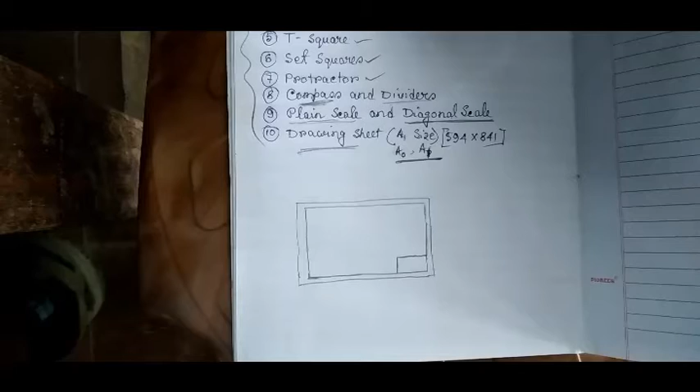Today I will show you how you can draw in the drawing sheet, how you can place the drawing sheet and how you can draw. So you know the drawing sheet, suppose A1 size, I have already told you that it has two faces.

Two faces means two sides are there in the drawing sheet. One face is smooth and another one is rough. One side is rough and another is smooth. You can easily feel it with your finger which side is rough and which side is plain.

So place the rough side always in front of your face. Keep your drawing sheet, place it on your drawing board, and the rough side of the drawing face must be above, facing you. So you have to draw your drawing on the rough side.

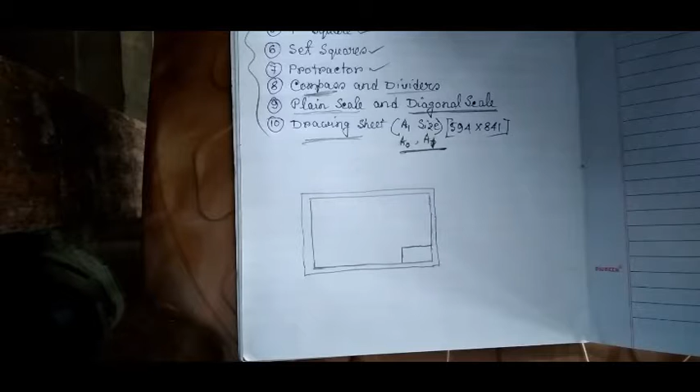Then you have to draw a border line also in your drawing sheet. So what is the border? Border means the portion enclosed by the edges of the trim sheet.

So this is your trim sheet, meaning the drawing sheet, trimmed. This one is your drawing sheet, the trim sheet - the space between the trimmed drawing sheet and the frame limiting the drawing space. So this is the border, and this is the border line that you have to draw.

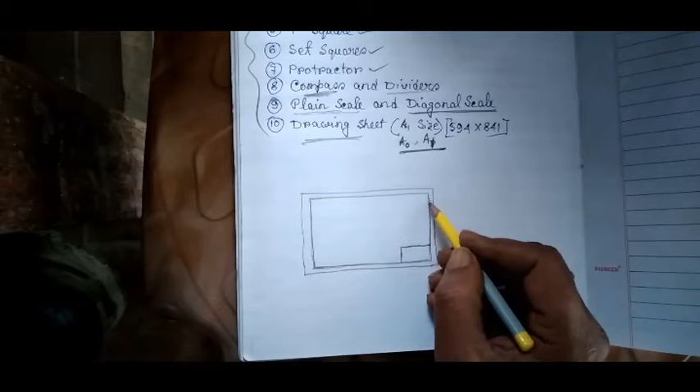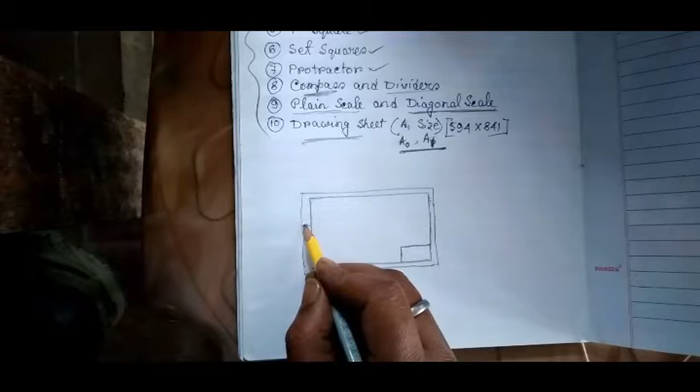First of all you have to draw this border line, and it has a specified distance from the trimmed portion. These are the trimmed portions of the drawing sheet. There is a specific distance of this border line from the trimmed portion. You take this distance from the trimmed section of the drawing sheet to the border line - it must be at a distance of 20 millimeters.

Take 20 millimeters at the left hand side, and on the other sides you may take 10 millimeters each. So this is your drawing space - you have to draw within this border line. Don't draw beyond this border line. This is your drawing space, and you have to draw any drawing within this drawing space.

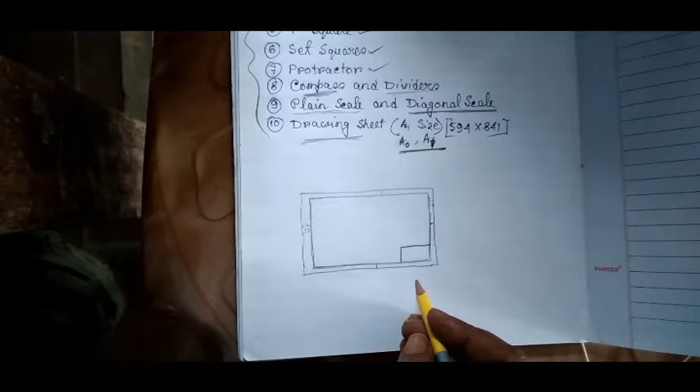Another thing you can see here at the right hand bottom of this drawing space - another rectangular box is there. This is called the title block of the drawing sheet. Title block means everything about who drew the drawing, the name, and every specification you can write here in this title block.

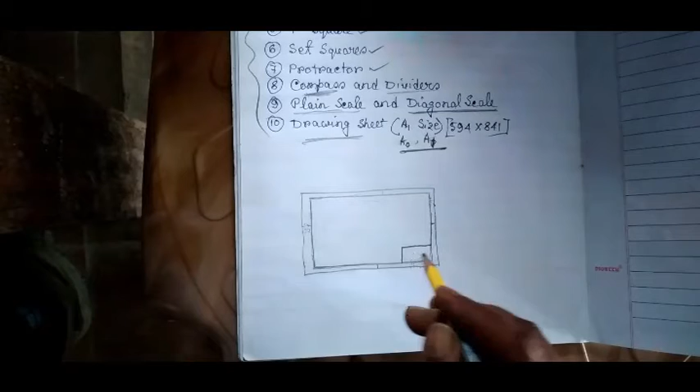The title of the drawing and so many other things are there that I will tell you later. So this is the title block, this is the border line, and the outer one is your drawing sheet. You place the drawing sheet on the drawing board and it is fixed with at least four board clips. Then you have to draw this border line in your drawing sheet.

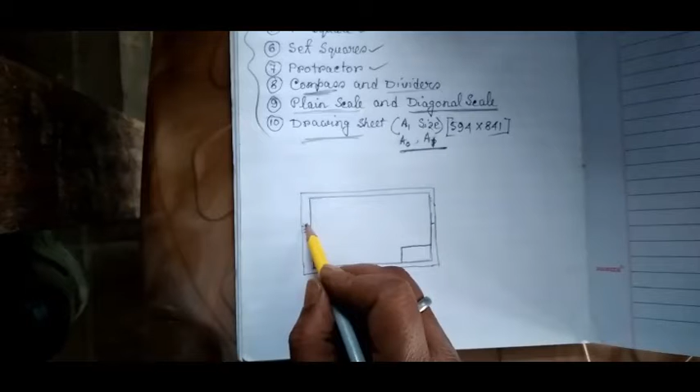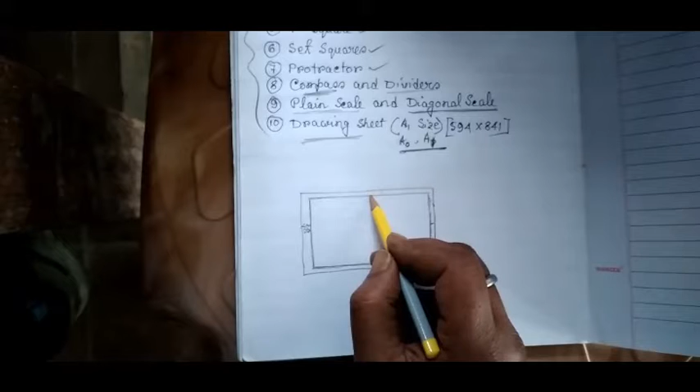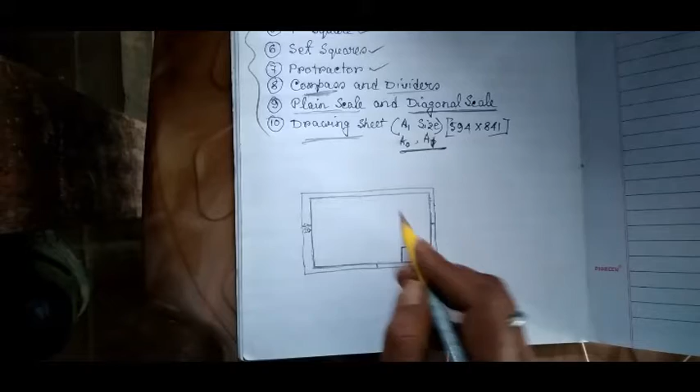As I told you, take 20 millimeters distance at the left as the border area. Take 20 millimeters from the left trimmed side of your drawing sheet. This line is 20 millimeters from this side, and the top line is 10 millimeters from the top. The right hand side also take 10 millimeters as a border, and at the bottom also take 10 millimeters as a border, then draw this border line. So this is your drawing space, understand clearly?

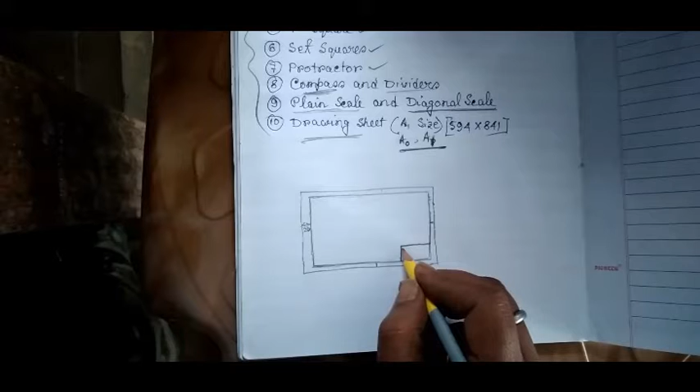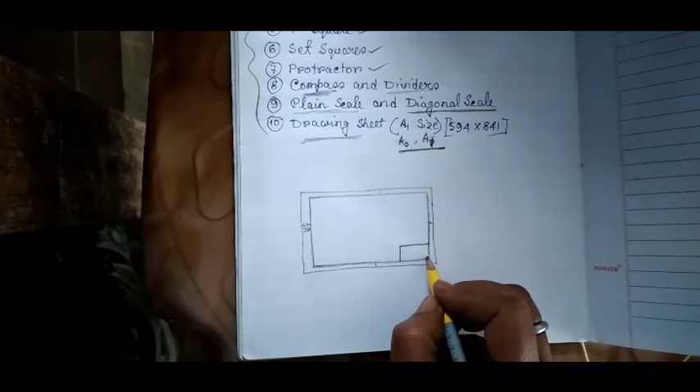The length of this title block is about 170 millimeters, and the height may be 65 to 80 millimeters. You may take it 65 from here to here - this is 65 to 80 millimeters. And from here to here is the length of the title block, you can take it as 170 millimeters. So this is your drawing sheet.

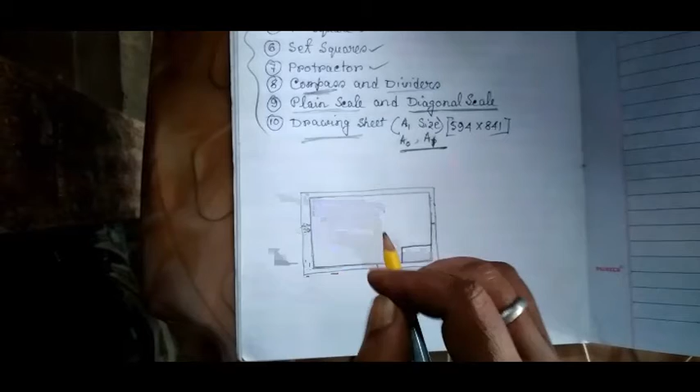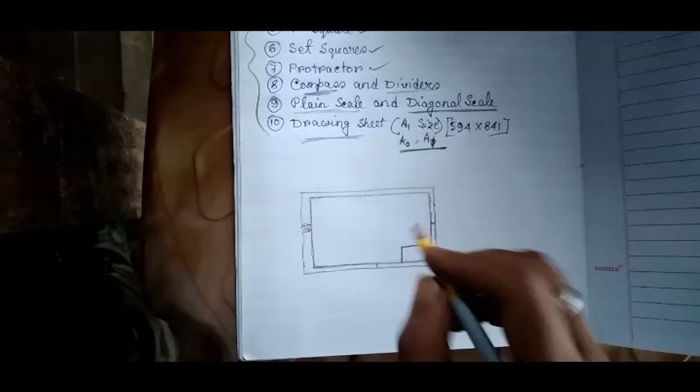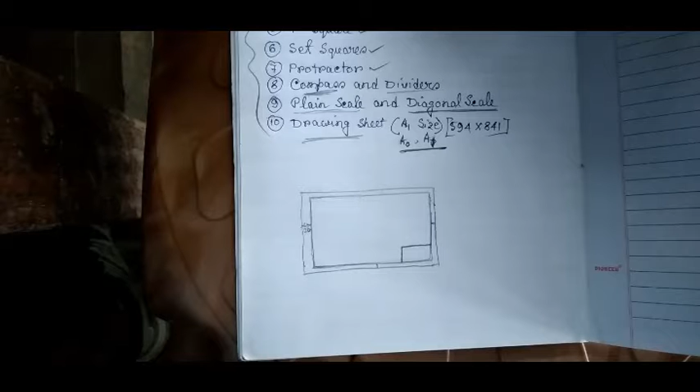Now remember that whatever drawing you have already drawn, whenever you want to write anything in your drawing sheet, that writing, the letters must be in block. Don't write any small letters - don't use small letters. Only use block letters or capital letters if you want to write anything in your drawing sheet. This must be remembered - whatever you want to write in your drawing sheet.

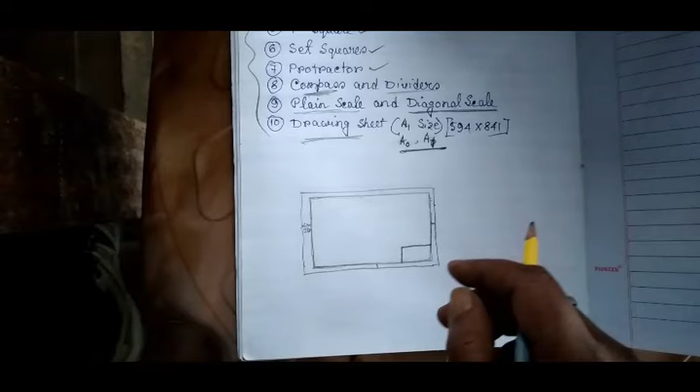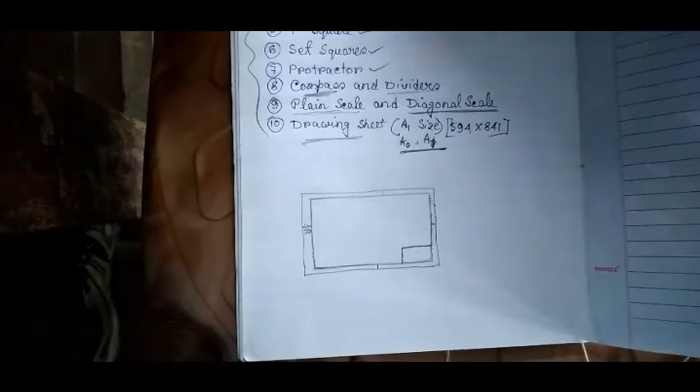So every time use capital letters to write anything. Understand? Now, in drawing, every line - if you want to draw anything, you have to draw a line. So every line in a drawing has a specific description and its applications also. Suppose I am drawing a line, two lines are there, this line and this line.

I've drawn here two lines. This line is a thick line, and this line is a thin line. Every line in this drawing has a specific meaning. This is called continuous thick line and this is a continuous thin line.

Every line has its general application. Suppose I want to draw a cube. A cube means whose length, breadth and height are all the same. Suppose I want to draw a cube.

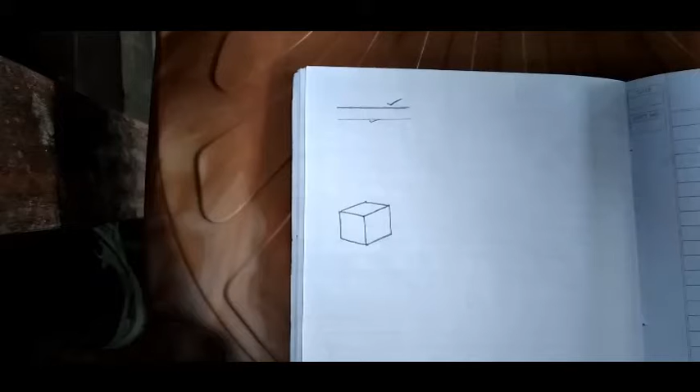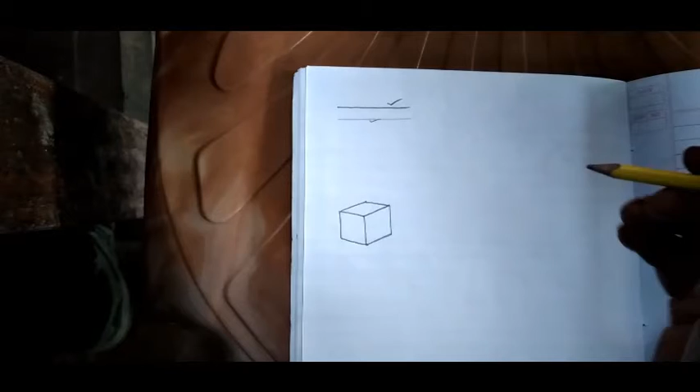You can see here, this is a cube. We draw this cube, meaning it is a drawing, but it represents a cube, you can understand. So we draw this cube with the help of this continuous thick line. What is the application of this line in drawing? That is the visible outline, meaning it is the outline of the cube, and we draw the cube with the help of this continuous thick line.

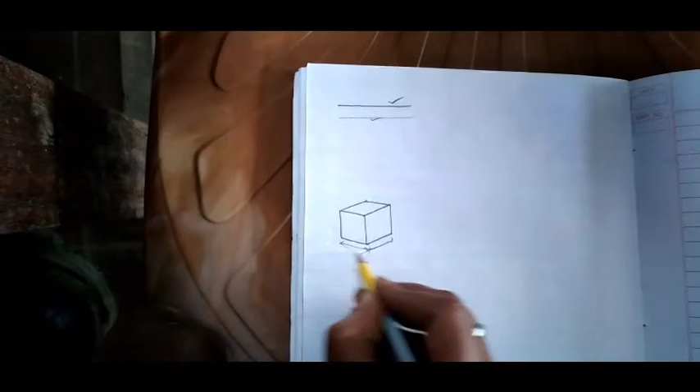So here you can see that this is a cube. Cube means suppose this is length, this is breadth, and this is the height of the cube. In a cube, this length, breadth and height are all the same.

All are the same. Now, in a cube, how many edges are there? How many edges are there? And how many faces are there? And how many corners are there? That you have to know.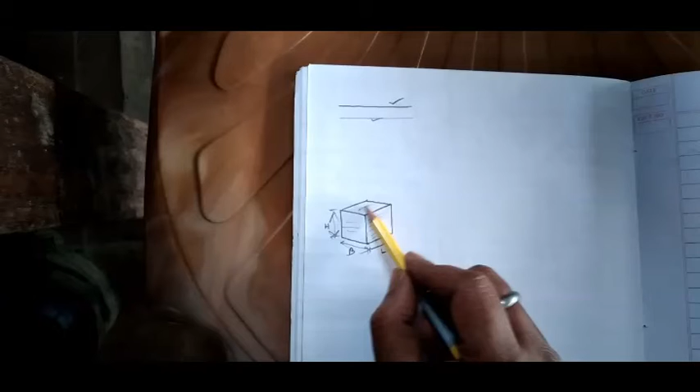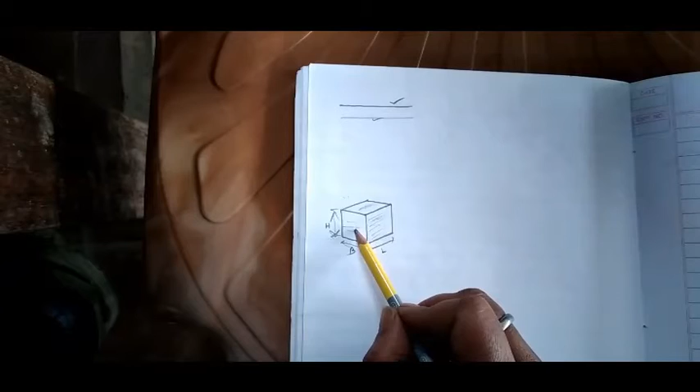So what are the faces? In a cube you can see this is a face, this is another face, this is another face. So 1, 2, 3 faces are there, and there is a bottom side, another face is there. In the right hand back side another face is there, in the left hand back side another face is there. So how many faces are there in a cube? 1, 2, 3, 4, 5, 6. So in a cube, 6 faces are there.

In Bengali it is called 'tall'. Chota tall ache, meaning 6 faces are there.

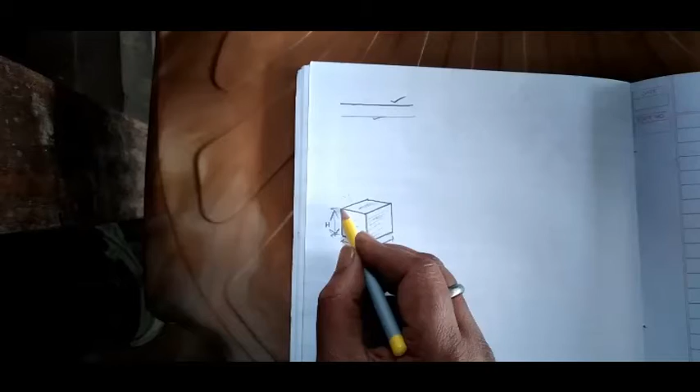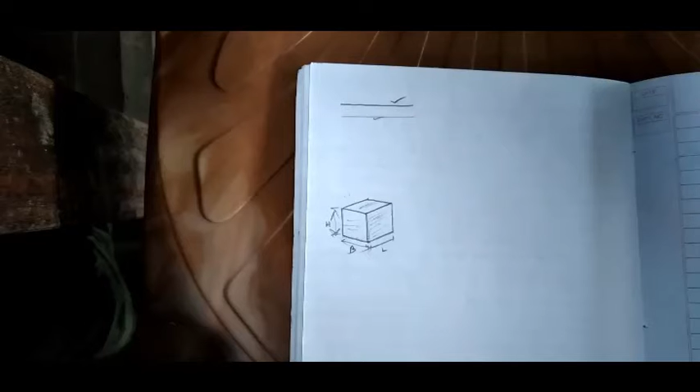And you can see edge. Edge means where two planes meet - this is a plane or face and this is a plane or face. So these two faces coincide here and this is called an edge. This is another edge. So many edges are there. In the back side, suppose here we can see 1, 2, 3, 4, 5, 6, 7, 8, 9. 9 edges that we can see in this drawing. From this side you can see how many edges here? 1, 2, 3, 4, 5, 6, 7, 8, 9. 9 edges that you can see in this drawing.

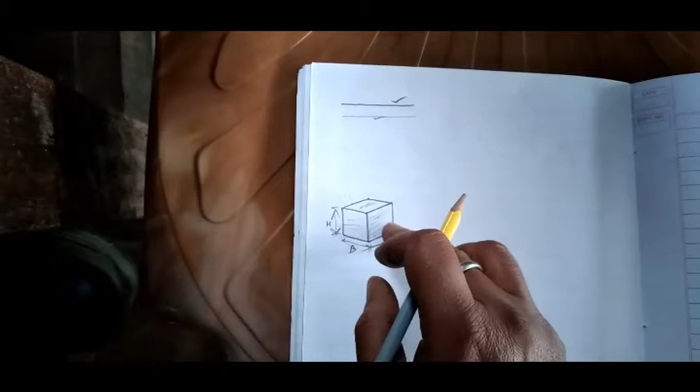But there are other edges too. How many edges are there in a cube? In a cube there are 1, 2, 3, 4, 5, 6, 7, 8, 9, 10, 11, 12. 12 edges are there in a cube. If you take a cube in your hand and count how many edges, then you can see that there are 12 edges in a cube. But in this drawing of a cube, we can see only how many? 9 edges. 1, 2, 3, 4, 5, 6, 7, 8 and 9 edges.

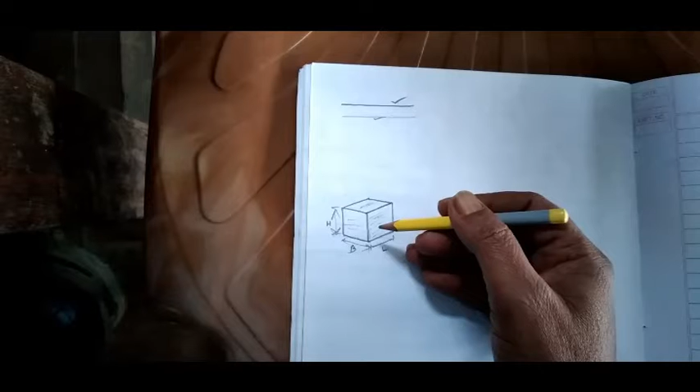But where are the other 3 edges? 3 edges are there behind or below, but we can't see them because it is a solid, and suppose it is not a transparent one. Not transparent means we can't see the back side from our front side - we can't see the back side because a wall is there.

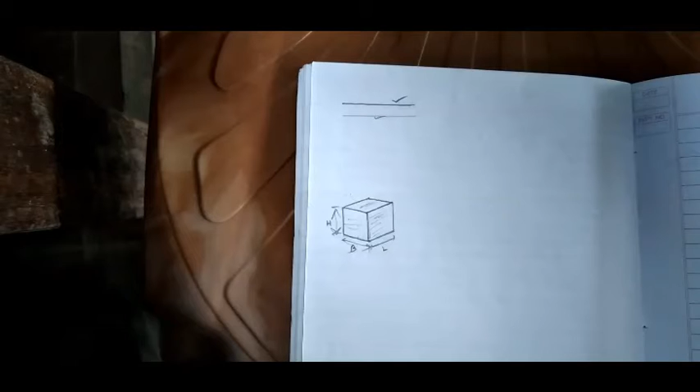Suppose in your house so many walls are there. You can see only the front side of the wall if you are in your room, but you can't see the outside wall. If you are inside the room, you can't see the backside of the wall. Why? Because I am standing in the front side, meaning I am inside the room, so I can see only the front side of the wall, because light can move only in a straight line. That's why the reflection of light from the backside of the wall can't reach our eyes. That's why I can't see the backside of the wall.

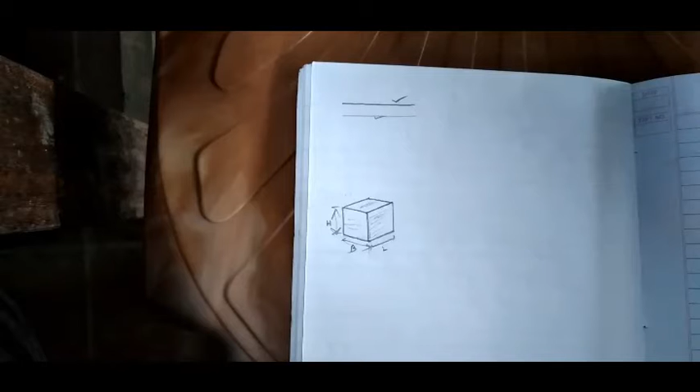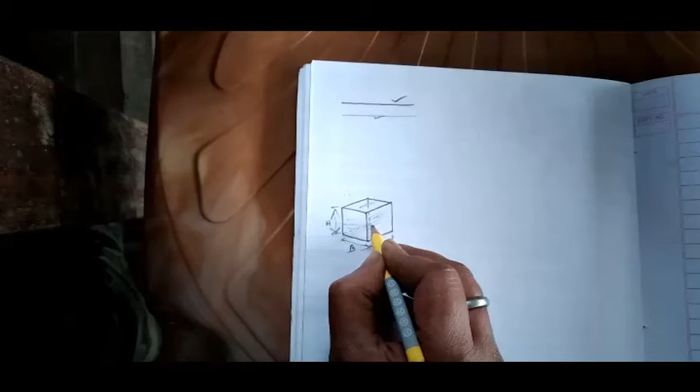And why can we see the front side of the wall? Because the light which reflects from the front side comes into our eyes after reflection. That's why we can see the front side of the wall. So in this cube, there are another 3 edges - where are they? You can see, just like this, other edges are there at the back side of the cube, just like this.

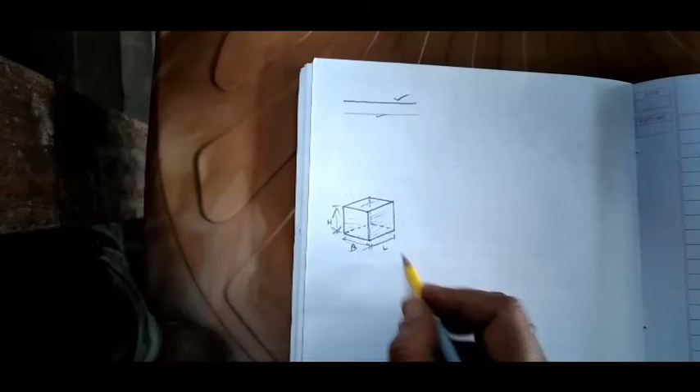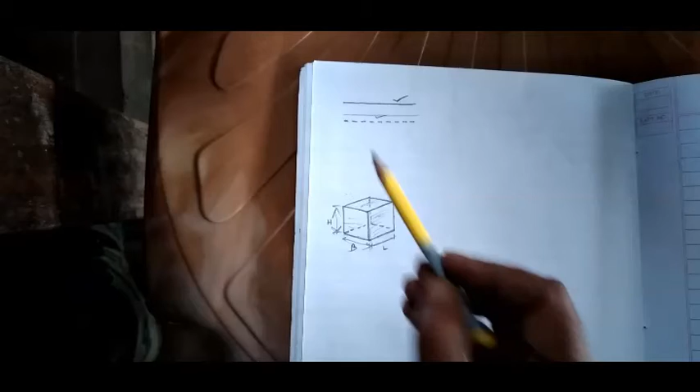So how many edges? These edges I can't see from the front side, but the edges are there. Now you count these back side edges, and I draw here a line also. That is an interrupted, not a continuous line. Understand? This line is called dashed line, just like this line. So these backside edges which are in the backside, that I can't see from my front, but the edges are there. I have drawn them with the help of this dashed line.

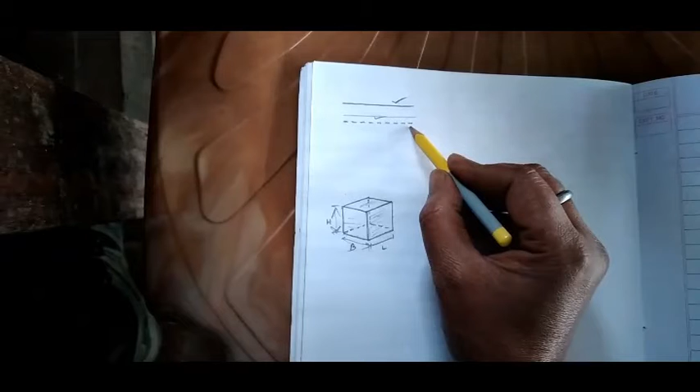This is called dashed line. So any hidden edges or any hidden outlines that we can't see, hidden means that we can't see, but edges are there. I can't see from the front. If I go to the back side, then we can see the back side edges, but from the front side I can't see it. Understand? So these are the edges, and this line is called dashed line.

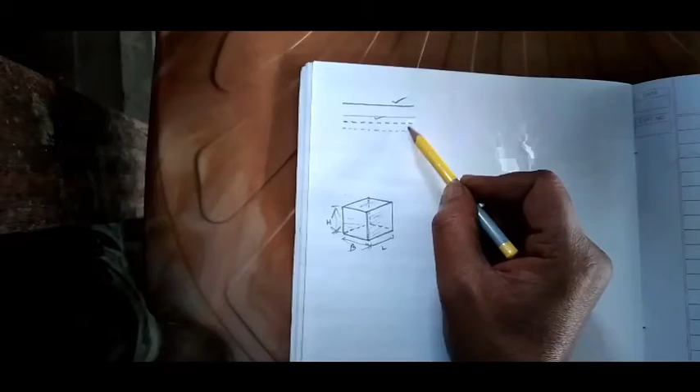Now another line is here. This is a thick dashed line and this is a thin dashed line. But we can use any one of the lines for showing any hidden outline or hidden edges. Understand? So it means that in our drawing, every line has a specific application.

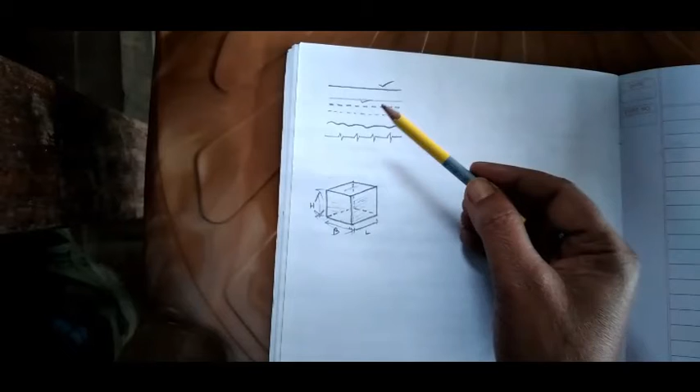Suppose this is a line, and another line is just like this. This is a continuous thin freehand line, and this is also a continuous thin line but with zigzag line. So this one is a continuous line with freehand, and this one is a continuous line with zigzag. Understand? So these two lines also have a meaning there.

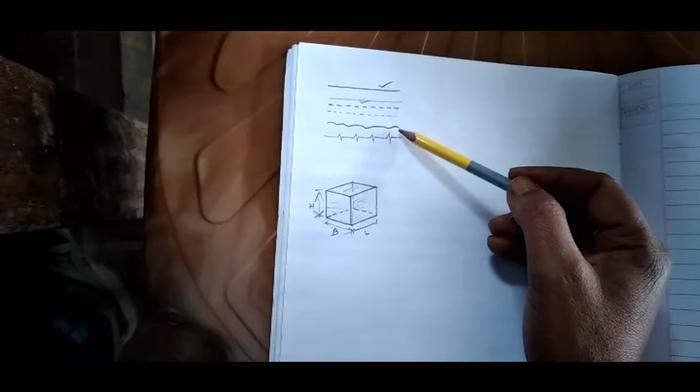So one is also called a breaking line, or also called break line. So it has also a general application there. So it has also a specific meaning of this line. So in drawing, so many lines are there that have specific applications. So we have to know all these things.

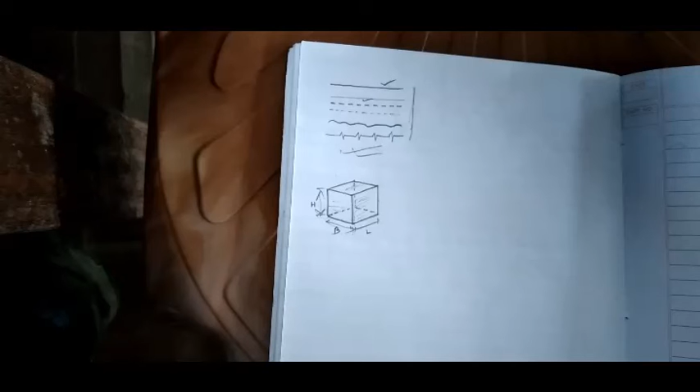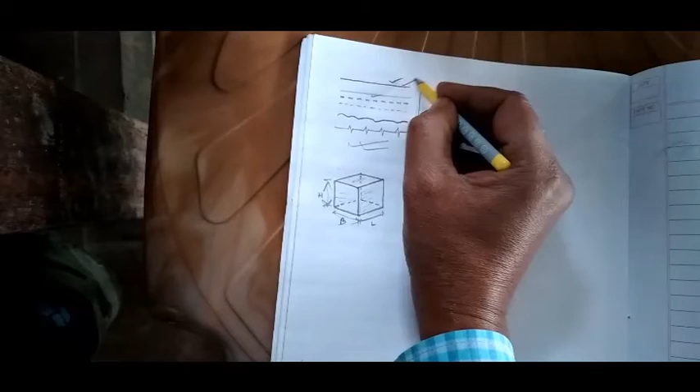So these are the lines and these are the spacing. You can see here these are the spacing and these are the lines. Today, you can see that I have already told you this type of line. Now what is the application of this thin line, continuous thin line? It has so many applications.

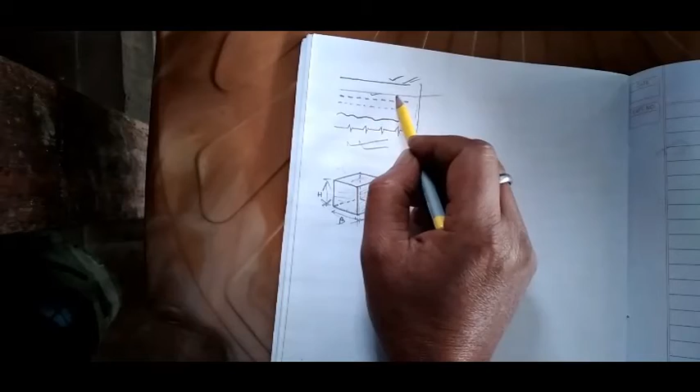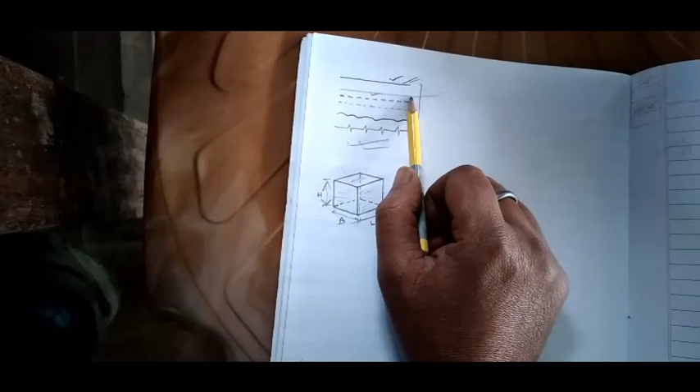Number one is the projection line. We can draw projection line with the help of this thin line, and leader line also, and dimension line also, and the extension line. This is the general application of this continuous thin line. Means that is a projection line, and we can draw hatch line with the help of this line, and we can draw the leader line with the help of this continuous thin line, and the extension line that we can draw with the help of this continuous thin line. Understand? So these are the lines used for this thing.

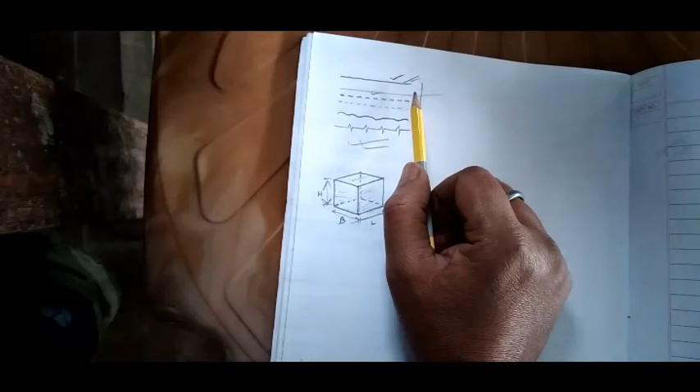What do you mean by leader line? A leader line is a line referring to the features like dimension, object and outline. Understand? Dimension, object or outline. So we can draw a cube with this thin line also. So this is the outline of the object. And dimension, suppose, what is the dimension?

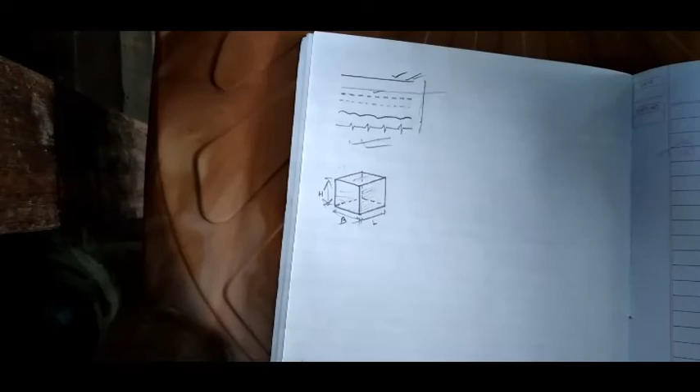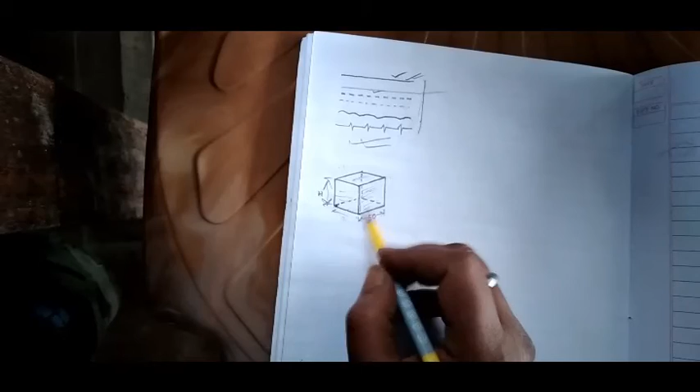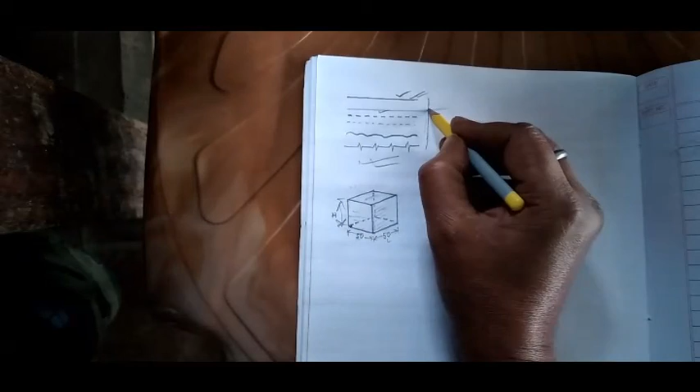Suppose if I want to give the dimension, means what is this length? Suppose its length is 50 millimeter. So 50 millimeter means from here to here, this is 50. And these lines are all what? A thin line. So this is a dimension line. On this side also, as it is a cube, this breadth is also 50. So we have to draw this line with the help of this continuous thin line, not thick line. The dimension, and in the height also, this line is a dimension line from here to here. Understand? This is a dimension line. So we can draw dimension line with the help of this thin, continuous thin line.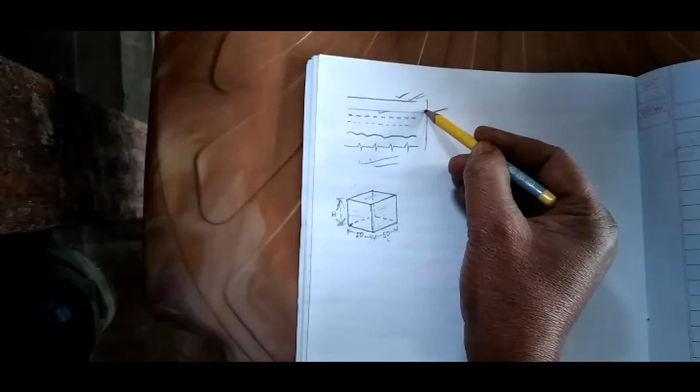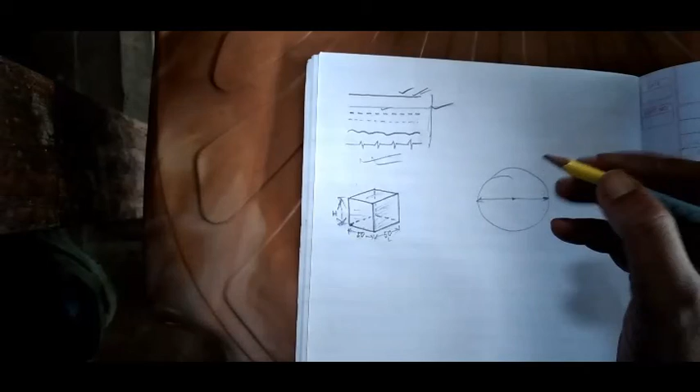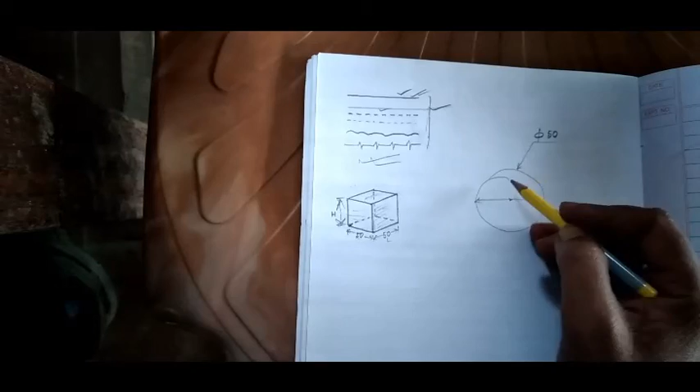And what is the leader line? Leader line is the - suppose a circle is there. And what is the diameter of the circle? This is the diameter of the circle. This is the center of the circle. So what is the diameter of circle? We don't know the diameter of the circle. Then we can deal with the help of a leader line, with the help of this continuous thin line, that this is the radius, this is circle, circular portion circle. So suppose its diameter is ϕ50 - meaning its diameter is 50, meaning diameter. And if against this, we can write also the r.